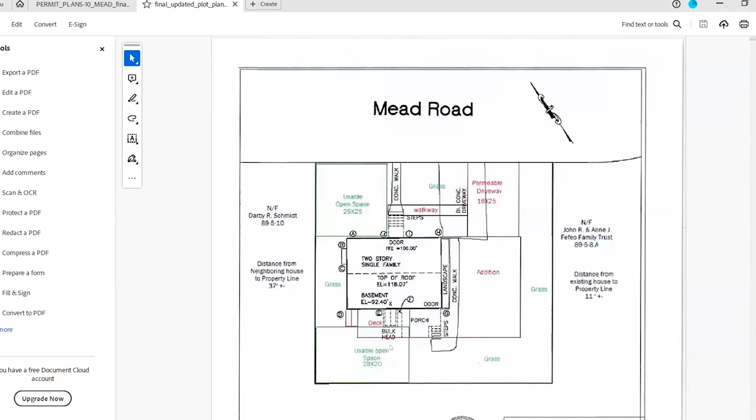So this is the plot plan, so the existing house is in this position here. They're proposing to move the bulkhead over, add a deck here at the rear, and then construct an addition here. This is the large addition because it will be in excess of 750 square feet. There's two areas noted for usable open space. I'll return to those in a second. And this is the plan that had been submitted earlier, so it's a little cleaner. You can sort of see the dimensions a little bit easier. That's correct. So to show the proposed setback requirements.

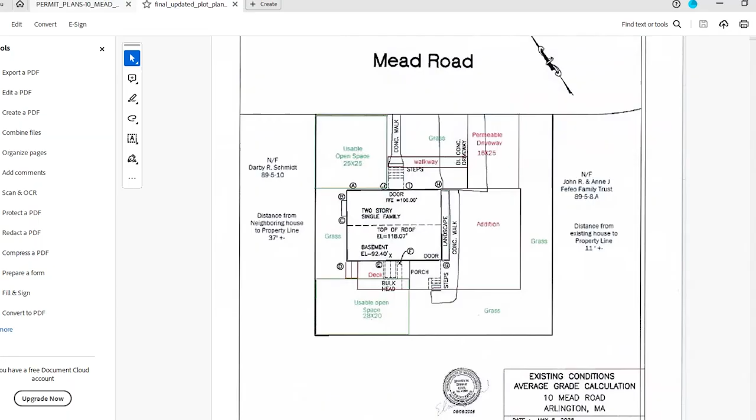And then these are, hopefully you can see them, these are the submitted house plans. That's correct. So the footprint of the existing house is this piece here. And so the addition, a deck on the back, an enclosed entrance here at the front, which we'll note would be, I believe, technically within the front yard setback, but under 5.3.9A, that's allowed if it's under 25 square feet. And so that would clearly be under 25 square feet. Then the proposed upper floor, and then the basement plan.

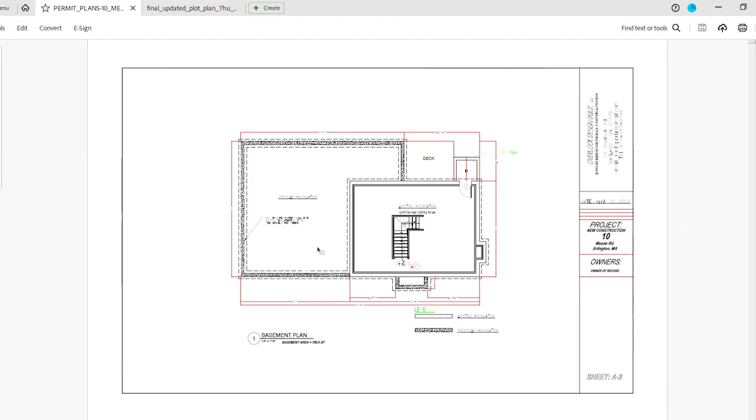So the proposed foundation, would this be a cellar under the addition, or would it just be crawl space? So essentially, most of that is going to be the proposed two-car garage, and above the garage it will be living space, and then the backside is just going to be crawl space. So it will not be a full basement. Okay. And then that's the attic.

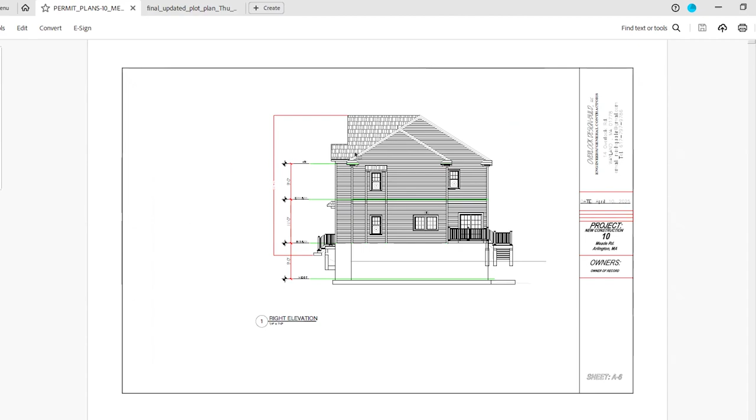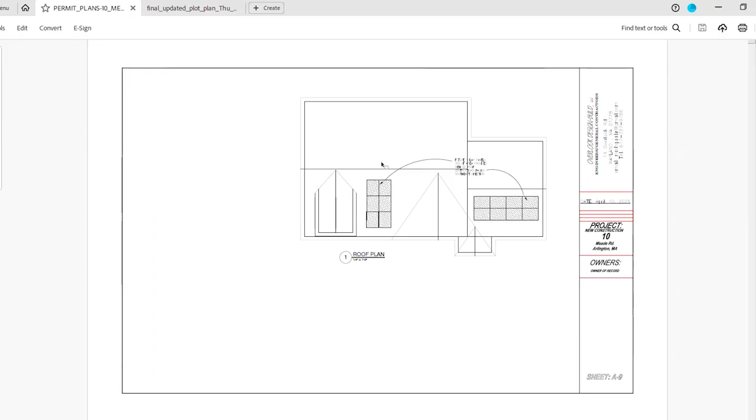Okay, yeah. So you can see here on the front elevation, garage under. This is that entrance piece, the front, side view. This is the outline of the existing house here, and then you can see the addition beyond. Oops, excuse me. It's the opposite direction, and then from the rear, with the existing and the addition. I note the existing house has a chimney on this side, so I believe you're removing the chimney. Is that correct? That is correct, yes. Okay. And then the roof plan with solar locations, and then we have structural plans.

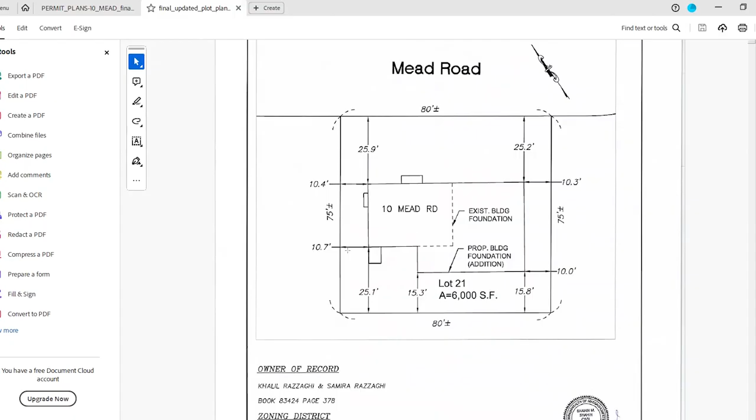Okay. So I had a couple concerns about the usable open space I just wanted to come back on. So at the rear of the house, you have this area that's identified as being usable open space at 28 by 20 feet. So by the bylaw, usable open space has to be at least 25 feet. But it does appear that there's 25.1 feet to the rear of the house. So this area here should all qualify, which, going by the numbers on this yard setback and this yard setback, and the dimensions along the back of the house, this rear dimension would be 29.37 from this line here to the side yard. So 29.37 times 25.1 is 737 square feet of usable open space in the rear.

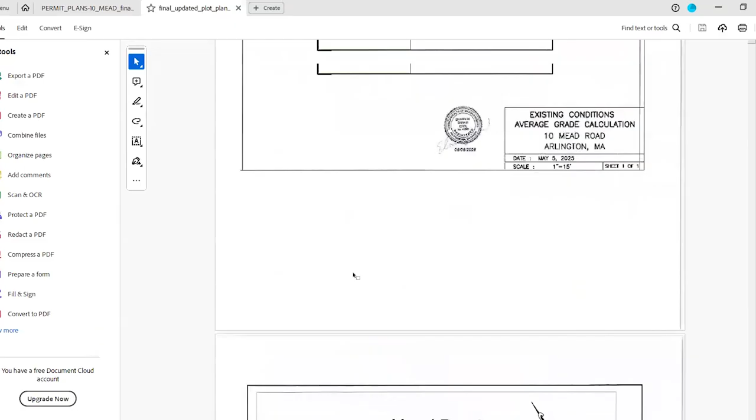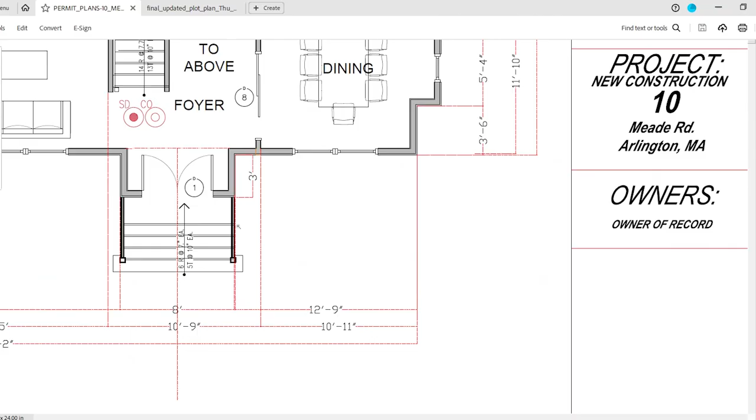And then here at the front, it's identified as a 25 by 25. So doing the similar calculation, it's 10.4 here. But this enclosed portion of the building, which is 3 feet deep, is only 12 foot 9 from the corner. So when you add those two up, the 10.4 and the 12.75, it's only 23.15 feet. So it's not 25 feet to this point. It's only a little over 23 feet, which unfortunately means that this portion of the front yard does not meet the requirements for usable open space.

So the only usable open space you have is that 737 square feet, which then we go by the percentage of the gross floor area. So that actually only represents 19% of the gross floor area when it needs to be, I believe, 30%. Sorry to interrupt. No, please. Does the usable open space always have to be the dimensions of more than 25 feet? So it has to be at least 25 by 25 is the way the definition reads. Okay.

So the site currently, because the entire backyard plus this entire side yard area qualifies, you have an existing percentage of usable open space, which will look to roughly be around 209%. And so you're going to need to make sure you stay above the minimum threshold for usable open space. Sure.

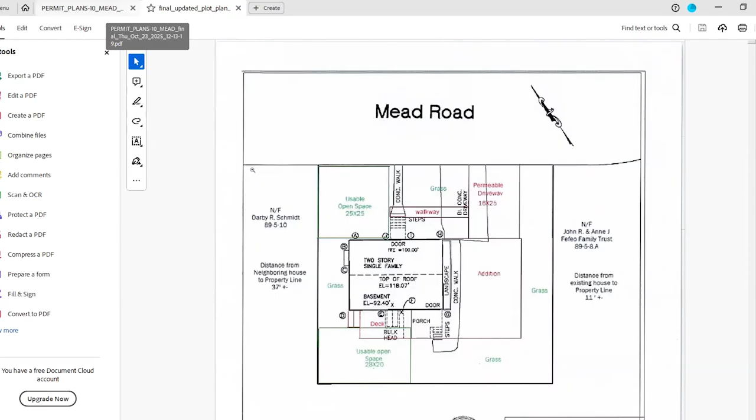Okay. Mr. Chair? Mr. LeBlanc? I just wanted to jump in. I wanted to discuss the front bump out a little bit further, since we're discussing moving it. I believe that this front bump is actually increasing or providing a new nonconformity because it is 2 stories tall and it is an enclosed building structure. So it is now making the front setback non-compliant because it's extending the foundation. It's moving the foundation of the building.

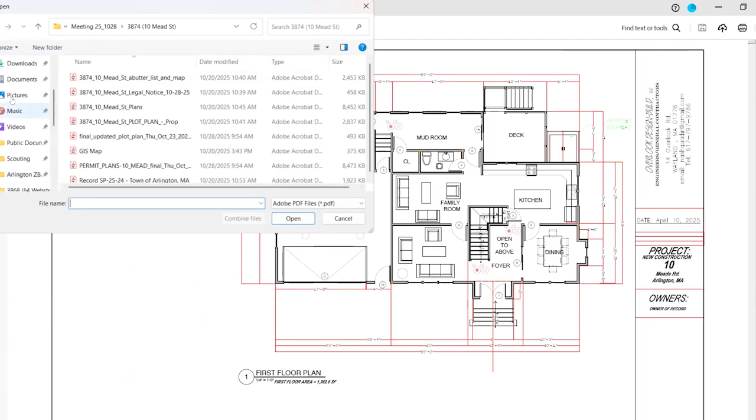Because it's 8 feet by 3 feet, so 24 square feet. So it would be adding square feet beyond the front foundation wall. Yeah. And that 5.3.9A that you were referencing also says it can only be 1 story. Yep. And this bump out is 2 stories. Five, three, nine.

Projecting eaves, chimneys, bay windows, balconies, open fire escapes, porches, and enclosed entrances not more than 25 square feet in floor area or more than 1 story high, which do not project more than 3.5 feet beyond the line of the foundation wall, may extend beyond the minimum yard regulations otherwise provided for the district in which the structure is built. Porches and enclosed entrances larger than allowed above may extend into the minimum yard regulations otherwise provided for the district by special permit.

So, Mr. LeBlanc, does that second sentence give us the ability to approve it through a special permit? Yeah, then we would just need to add the approval of 5.3.9A to the approval for a large addition. Okay. Thank you.

Okay, so what we would need to do, so the board would be looking now at two different sections. So we're looking at 5.4.2.B.6, which is the large addition, and also at 5.3.9.A in terms of the size of the enclosed front addition. And we would also need to condition the approval on the change to the entrance, that it be relocated to provide a minimum of 25 feet from the edge of the foyer piece to the front lot line.

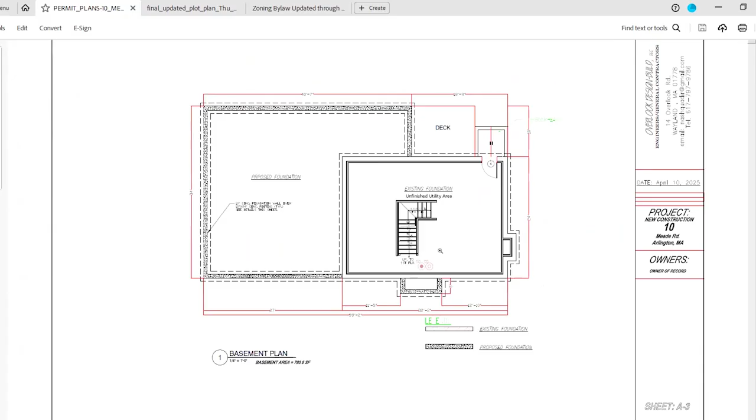Are there other questions or comments from the board? Mr. Chair. Mr. LeBlanc. I have some additional ones, please, in terms of the elevations. Yep. I guess the first ones I wanted to address are the front and the rear elevation.

I sort of, looking at what we have for the residential design guidelines and that we're supposed to consider them in these situations. The window type G on this elevation just doesn't really work well stylistically with the rest of the windows in the building since it's a solid pane and the rest of the windows are 6/1s with muntins and stuff. It sticks out. It doesn't go with the style of the rest of the building.

And there's also a window on the rear elevation that does a very similar thing where it's a large expanse of open glass. I'm not opposed to that because I see what is trying to be accomplished on the inside. I just would like it to try and reflect the rest of the windows on the structure.

If those proposed windows had muntin bars in them, similar to the sort of more colonial look, would that be what you're thinking? Yeah, it doesn't have to be like a double hung look, but as long as it had the muntins similar to the rest of the windows, I think that would be a more satisfactory design.

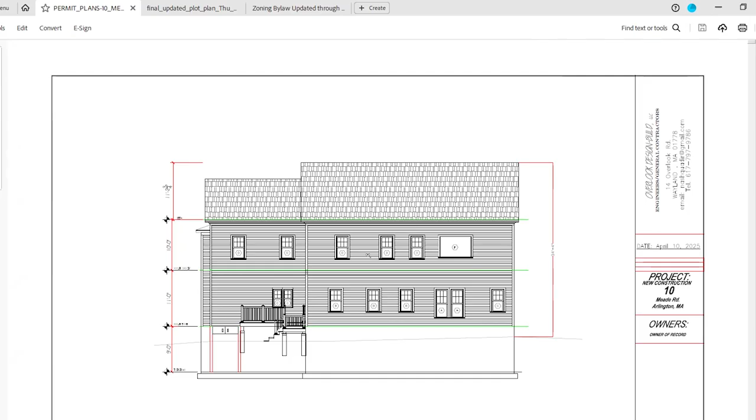And then my other comment is related to sort of the rest of the windows on the elevations. It would be nice if we could get some better window alignment throughout. I don't necessarily know if I want to go through every single one at this point, but there's just some windows, like at the front here, I think is a good example. We have the two windows to the left under the gable that are aligned with the center of it, but then the windows right below it are slightly misaligned from that. And then the triple set of windows below that are slightly misaligned from the rest of it. So I would just appreciate another pass of some alignment of windows.

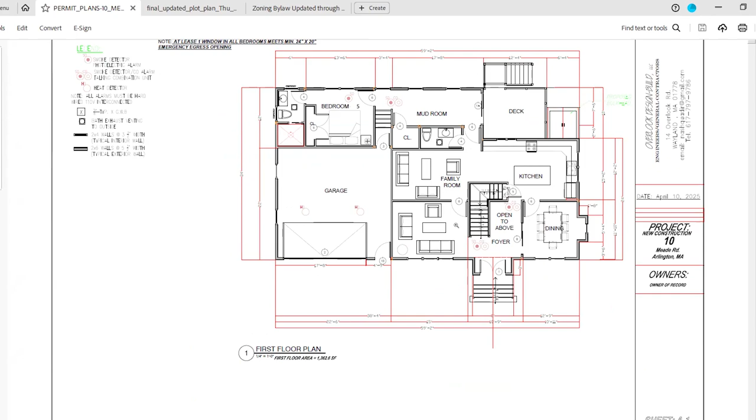One of the tenets of the residential design guidelines is to provide a pleasant looking elevation that isn't necessarily driven by the interior program. And sort of what we're seeing here is the interior program sort of delineating where the windows are. If I go up to, so this is the second floor level. So this is those on the second level, and then on the first floor level, it does appear to be sort of centered in that living room. The next level above, it's in the bedroom, but it's not particularly centered on the bedroom wall.

And then in the attic floor, yeah, so it's obviously centered on the gable because of the gable. So looks like it may be possible to slide these over. It's difficult to tell. This one may be more problematic just because of the size of the windows. How do other members of the board feel about the windows?

If it would please the board, I'll gladly have the change made of the three double hungs to a two double hung, so that it ends up lining up with the second floor windows and give it some uniformity. Like you said, it'll be difficult to move the windows in the gable, but by changing the three double hungs on the first floor living space, I think you would better align.

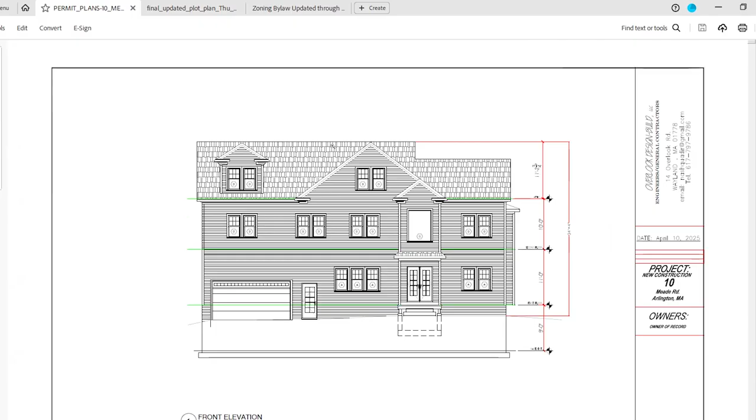So would you suggest having the second floor windows move over to the left to kind of align with the center of the bottom set of windows, but then it's going to be obviously too far off from the gable windows? I bet you if you started to look at getting those set of windows here in what is bedroom 2, if you started to center those on the room, you'd probably actually be doing the room a favor with having the windows centered there and also starting to align the windows here in the second floor with the ones that are on the third floor. Okay, yeah, then we would start to have something. Sure. I have no problem with making those changes. Yeah, there's other ones on other elevations.

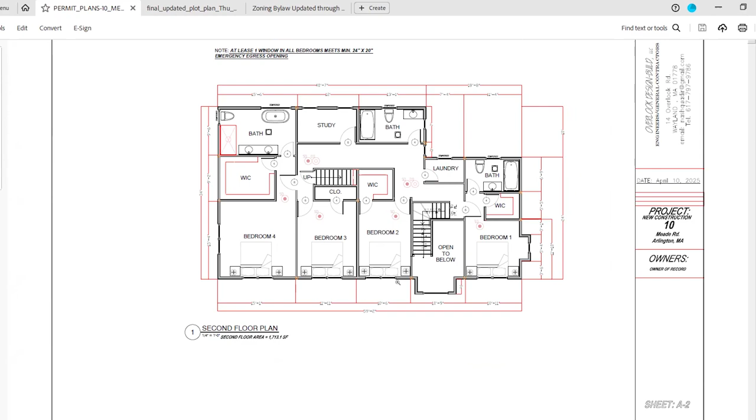I don't know if we want to go through all of them individually or not, but it's totally up to you guys. If you have the time, great. If not, I'll just make sure the architect pays more attention to lining them up better. Yeah, if they could just take another pass at understanding the exterior alignments.

I think another good example is on this left elevation here, we have the type C window on the first floor and the type C window on the second floor, but one would think they'd be stacked on top of each other, and they're not. Just something to look at, consider. Surely.

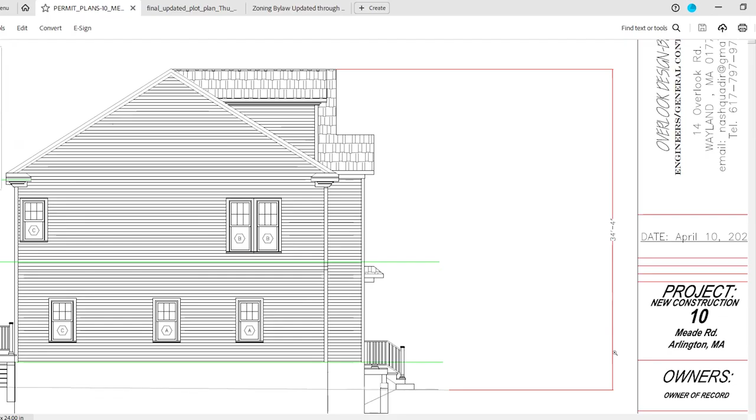I did have one other question related to this. Looks like there are some significant trees on the left property line where the structure is starting to get close to those trees, and I can't quite tell what the distance will end up being or how big they are, because they're not quite identified on the survey here. Given the size of this, I'm pretty sure there will have to be a tree plan and coordination with the tree warden in town, so I'm not too worried about that, but I just want to make sure that's brought up, that we're going to be getting pretty close to those trees and their root zone. I'll be working on that with Mr. Tim.

Was there anything further from the board? Seeing none.

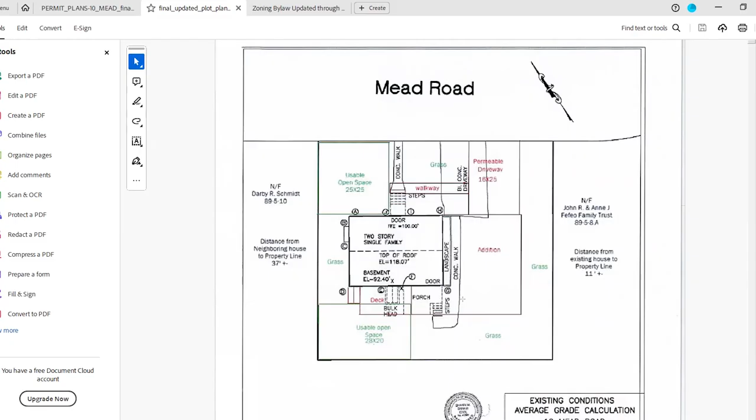Thank you, Mr. Chair. That is wonderful news, and we certainly appreciate you making that adjustment to make that happen. My cross to bear in life is tree protection, so thank you so much. Thank you, Mr. Chair. Thank you, Mr. Moore. Are there other members of the public who wish to address this application?

Do not see any raised hands. So with that, I will go ahead and close the public comment period for this hearing.

So as we notice, what the board has before it is an application originally filed for a large addition under section 542B6. And as had been noted by Mr. LeBlanc, the location of the proposed entrance at the front of the building also requires the board to issue a special permit under section 539A to allow an addition larger than what would be allowed by right within the front setback.

Looking briefly through the application and the zoning numbers.

So the proposed lot coverage in the initial application had been calculated incorrectly. The applicant has come back with a revised figure of 31.08, which seems to jive with what I have, which is less than the maximum percentage of 35. So there's no issues there.

The lot size is conforming, the lot frontage is conforming. The front yard depth is conforming. We just need to grant the special permit for that entrance piece. The side yard depths are fine. The rear depths are fine. The maximum height is fine.

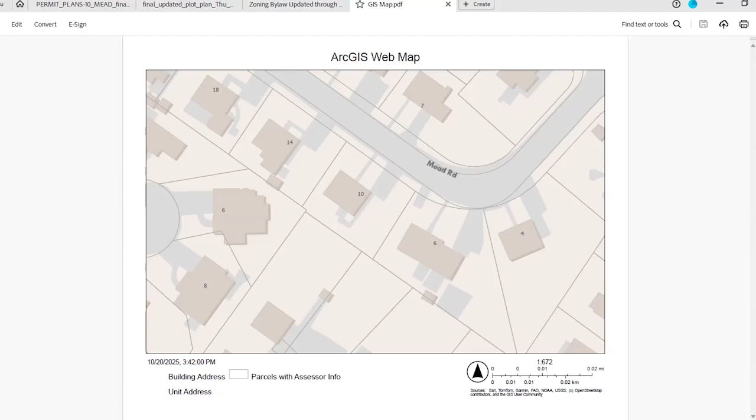And so I think between those, the board can find that the alteration or addition is in harmony with other structures and uses in the vicinity. Are there any questions from the board regarding those required findings? Seeing none...

We also would need a special permit under section 539A. 539A does not have any specific findings that need to be found, so those would just be evaluated as part of the overall special permit criteria, found in section 333 of the zoning bylaw. The general finding that the board needs to make is that the adverse effects of the proposed use will not outweigh its beneficial impacts. And in reaching that finding, the board needs to find that the requested use is allowed, or allowed by special permit, in the district.

So this is, I believe, in the R1 district.

So the large addition is allowed by special permit under section 542B6, and the front entrance would be allowed by a special permit under section 539A.

The requested use is essential or desirable to the public convenience or welfare. This allows for an orderly expansion of the home to suit the needs of the homeowner. In the application, the homeowner noted they're also seeking to allow other generations of their family to join them in the home, and so this would allow them to do that, accommodating essentially a bedroom suite on the first floor, as well as living space for the family on the upper floor.

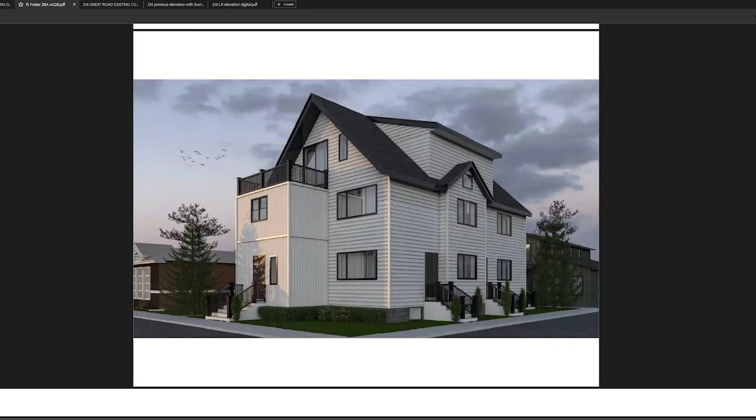And I have some renderings here. Let me get rid of my pencil here. So in keeping with what's around here, we're looking to close in the front here. Let me get my pencil back out. Close in this front, essentially move the roof deck up one level, as this is a walkout for the master. This becomes two closets for the bedrooms on the second floor. And then this is a half bath here with a mudroom over here on this side when you walk in.

And then as you can see, these are the separate entrances, the two forms of egress up the first floor, and then the back unit over here. In an attempt to keep the integrity of the neighborhood and the house, we've left a lot of the gable ends alone. We had to raise this pitch slightly just to get the right roof height, but we kept it in keeping basically with everyone else in the neighborhood. We left this gable end here and built a dormer around it, all with the goal of continuing to blend into the neighborhood.

And I have some construction drawings if you're interested. I don't know if you are, or where you'd like me to go next, but that's kind of the outline of what we're looking at and my request to you guys. Great, thank you. Yeah, if you wouldn't mind just walking quickly through the construction plans.

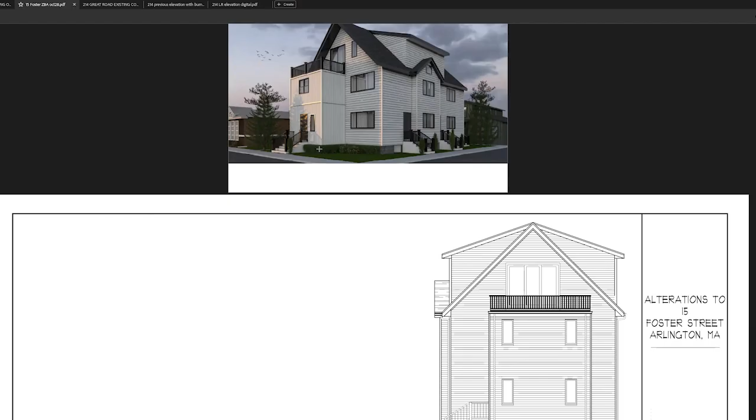Sure. All right, so the reason I'm here is because this front porch is within the front yard setback. It's a pre-existing non-conforming structure, and we have zero change or request to change the footprint. The rear of the building is not within the setback, so I don't think it's really an issue. So as you can see in our rear elevation, this does get closed. When I first bought it, the bottom floor was closed, and this was kind of half open, you know, clothesline, stuff like that. I think they had some three-season use for it.

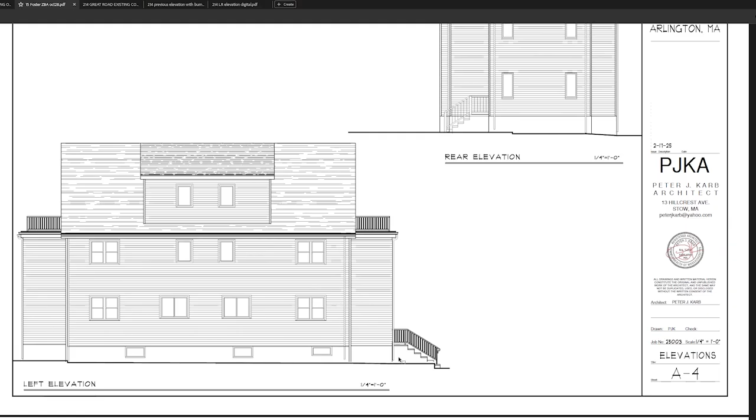Let me move down here. So this is the elevation on the opposite side, not the driveway side, right here. And as you can see, we have the two matching roof decks. This was previously more down here, but now it's gone up. The front elevation showing the entrance, unit 1. The right side elevation standing in the driveway. So you can see the egress here, here, here, and here.

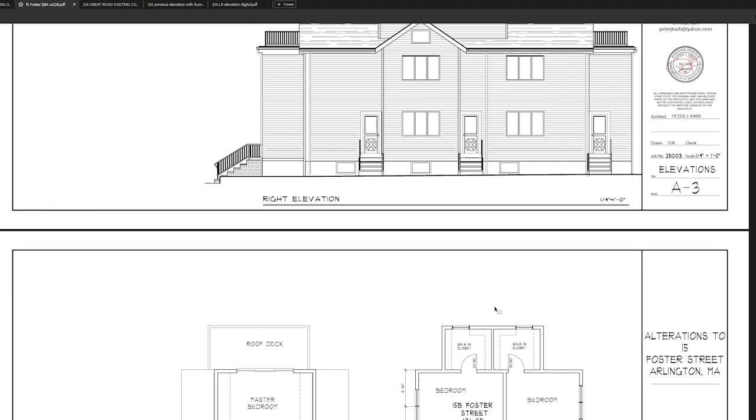And then, all right, this is actually pretty important. So let's go down here to the first floor plan, and I can show you. So where are we here? The front, hold on. So this is the unit in question. This is what we're talking about. As you come up these steps, as you can see, we're very tight on space when you divide this thing in half. We get one study down here, a small galley kitchen. I guess you could put the couch and stuff over here.

So it is, I think, necessary in maximizing the footprint and the highest and best use for the property. I think it lends to more living in the unit, because by chopping it up, it's just going to discombobulate the whole first floor plan. That's that. And then as we go upstairs, the second floor features three bedrooms.

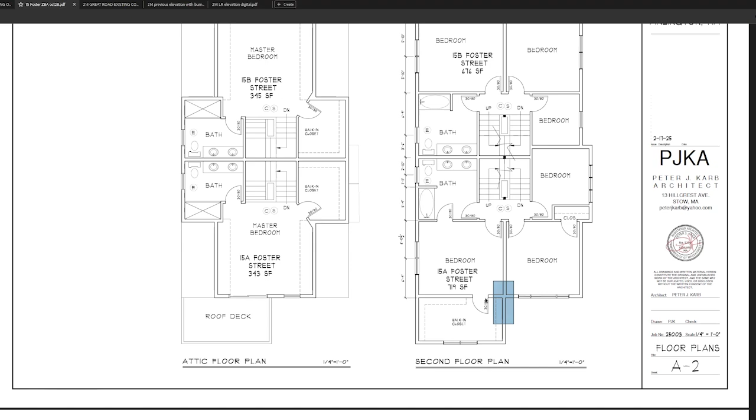And then this is a little off. This bedroom wall is shifted over a little bit because this guy has access to a closet in here. Oh no, I'm sorry, I'm looking at this upside down. This is what we're looking at: the two walk-ins. And as you go upstairs, you have the two roof decks on the third floor. We're calling these the primary suites up here on the third floor. And the basement does have some small living area down there, right here. It's basically just a big open room, mechanical, and where we put the laundry and a half bath.

Are there egress windows in that lower level, that basement level? No, it's not intended to be living space; it's not a bedroom. We're well aware of that. We're calling it a playroom.

But this is because there's actually steps right here and right here, so there's really nowhere to put it. I've got condensers all the way down here, and we're kind of tight. We're just working for maybe some bonus space for a playroom, an office, a workout space. Just a really good use of the flex floor plan down there. Okay.

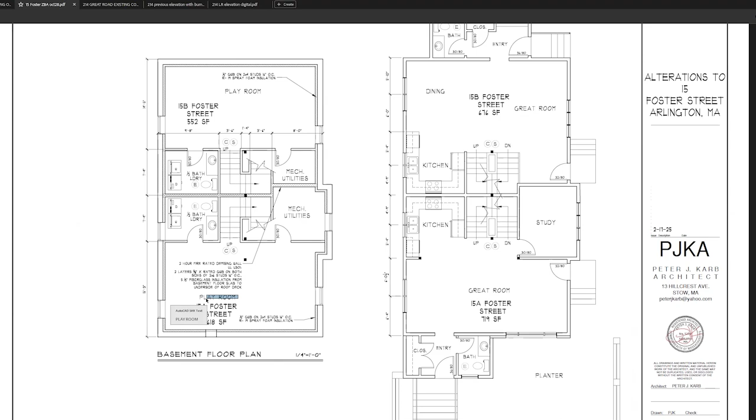And I'm happy to go back to anything or address anything, or I never know if I'm oversharing my screen, so just let me know if you want me to take it down. No worries. If you want to go ahead and stop the share, that's fine.

Yeah. So the application that we have lists the existing and the proposed gross floor area as the same, but you're definitely enclosing some space. Yes, so we're gaining. So yeah, you're right. The existing floor plan, I think my architect just captured that. But it's about 72 square feet per floor. I think it's a 6 by 12 area. That's how big that landing is. So we're adding that to the first unit. So it's a total increase of 144 square feet of gross floor area.

Well, I guess this goes into the definition of gross floor area because it did exist, right? Like this deck. So an open porch doesn't count towards gross floor area, but an enclosed porch does. Okay, good. Thank you for that clarification because I do a lot in Lexington and porches are not decks and decks are not porches, and porches count as GFA. So thank you for clarifying that. Absolutely. So I am adding about 144 square feet of gross floor area that's going to be taken up from the existing front entry and the existing roof deck above it. And we're essentially pushing the roof deck up and adding a floor on top of it.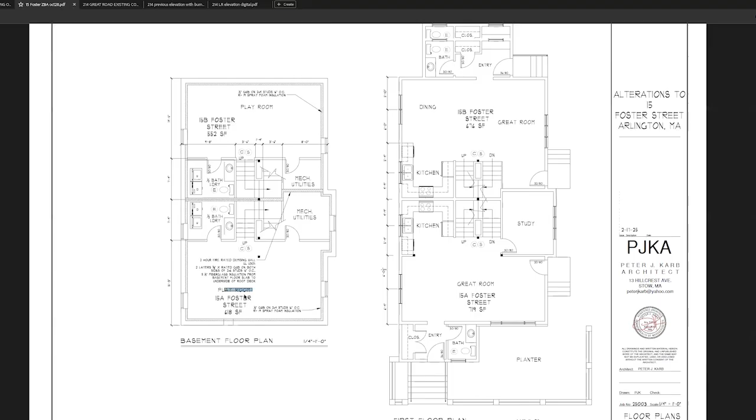Well, thank you for your comments. And I want to pull back up my screen if that's okay, so we can look together. That'd be great. So, here's our existing, I think this is a good view here, showing our existing versus proposed. And then, I know typically when we talk about these in Arlington, we have the typical porch that goes all the way across. And I think that's very easy in those instances to do something like this with the windows across and it looks like the two-family feel. But I think we're a little limited here in both location and layout, but we're doing our best.

And knowing that we were going to want this to look like a porch, because after speaking with the code enforcement office, they made the same comment, that you guys are very consistent in that. And they said, you can do this through maybe materials, layout, windows, et cetera. So we tried to do our best with that. And this is kind of what we came up with: we took the board and batten style siding in here to give a vertical type of feel, to maybe inspire feelings of the rail that was existing before or some other kind of rail.

The location of the windows, as I look at this now, I think maybe, if it makes a difference, on the side we could add one here. I'm limited here because there's this huge brick wall that comes up all the way over here in posts. And then there's a toilet right here. So I'm hoping that maybe if we can get away with the first floor, I'm open to taking comments on the second floor here, or if there's any recommendations, other projects the board has seen that they've liked. I'm open to working off of other plans as well.

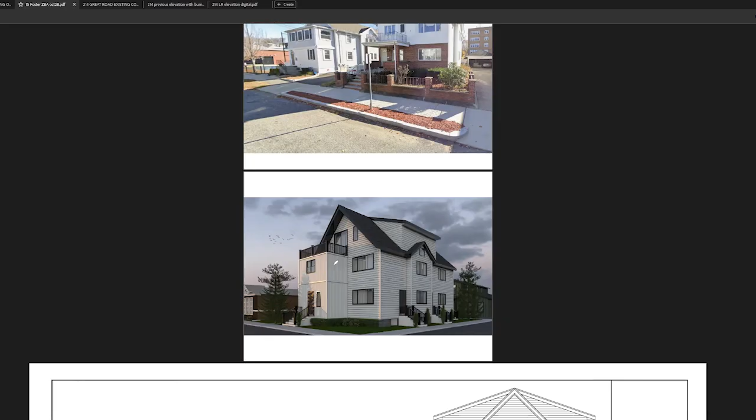Mr. Burns. So, I'm just kind of sitting here looking at this with you and thinking about how you would look at this. And just from this particular angle, I think we're kind of limited down here, but I think like Mr. LeBlanc, thank you for your consideration, especially with the layout and knowing that this is a closet. I was going back and forth, right? So I was thinking maybe we just add another window and bring a low paneling here where you have decorative box panels on the bottom that could maybe look like balusters of some sorts, and then add a window here.

But then I kind of go back to our original, what we're working off of, where it's not your typical, with the decks going from first story to second story. And what it looked like before, I think, always plays a lot. Like I always say, if you ever look at a new construction house, look next door, there's probably a boat in their yard that's catching that guy's eye, and that's why it's colored green or something. So when I was designing this, I was thinking, this looks very vertical, with the long lines of the posts and then the balusters above it. That's where my idea of the vertical siding came from.

But again, I'm open to helping if the board has a recommendation that they've liked in the past and that we can come to a mutual agreement on. I'm more than willing to do that or take advice from you guys at this time. So, Mr. Chairman, let me just... Yeah.

This is actually quite a different problem from the one we normally have had, because in the past, we've largely had something that had lost its identity as a projection into the yard and was kind of being incorporated into the house. And we've often dealt with that by asking for the support structure, so to speak, to be pulled back from the corner of the house so that it had a discrete presence that was distinguished from the house as a whole. And here we actually have that.

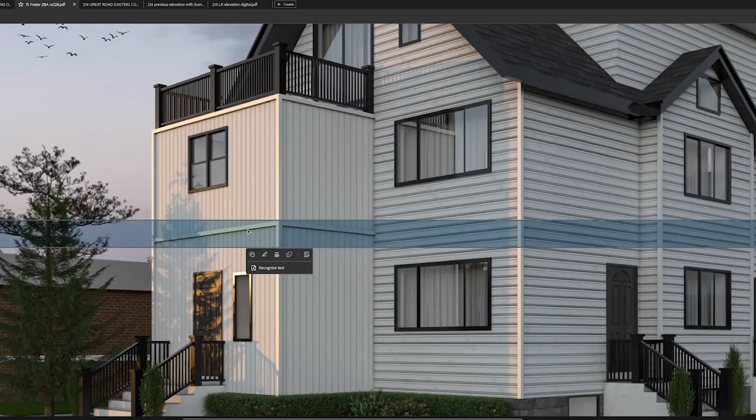So I guess I would turn that to the board. Do we feel that this is something, so I know like in the last case, there were a couple of things we had wanted to do, and we were able to write conditions that directed the changes we were looking for. Do we feel that this is something of a level where we can do the same, or do we feel that we need to see some revised drawings that would give us a better sense of what we're going to be seeing?

Mr. Chair, Mr. Baranowski, could I ask, could we just clarify? I think it sounds like there's possibly three elements that we're looking at here, or three parts of the space. I'm also not an architect on the board, so bear with me as I describe the space. It sounds like we're talking about possibly having more windows on the second floor, possibly a thicker bump soffit in the middle. And I'm not sure if we're really saying doing anything differently on the first level, because it sounds like lightening up the top might be enough. But I just want to make sure I'm clear on where we're kind of hovering around.

I believe those are definitely the different things we've discussed, but what sort of combination or permutation thereof, I don't think we've really ironed out. Well, can I add a possible?

Of course. I like adding the windows on the top floor for adding lightness, because if we could scroll back to what the house looked like, the bottom floor already reads heavier, the bottom porch, because of the brick. So as I look at this, trying to make this enclosed, I'm more concerned about the second floor being lighter, because of how open it is.

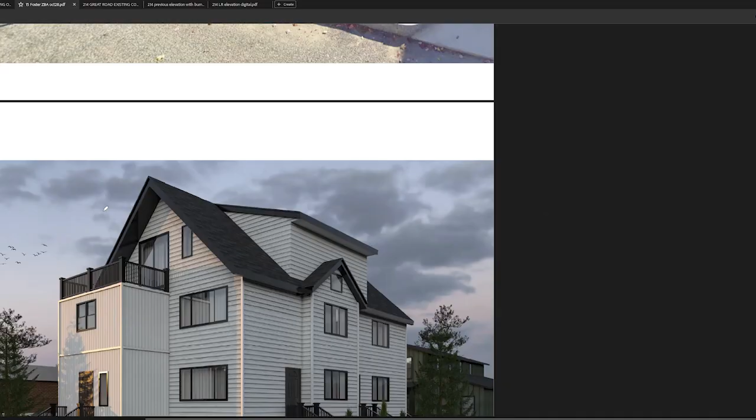But if the front facing elevation is more meaningful to the board, I think it would be much better to center it up, but just double this window, get one more of these, and just shift this guy over, and then add them right next to it. That might give us what the neighbor has next door over here.

And then also with the addition of building out a faux soffit of sorts right here. Which, actually, do you mind if I pull up, I'm going to go into my email here. I just sent it.

So this is what it looks like right now. Can you guys see this? No, we're still seeing the other. Oh, hold on, hold on.

Share. Let's go. This. Right. So this is what it looks like right now. Can you see this? There we go. So here we are existing as of today, or 3 days ago.